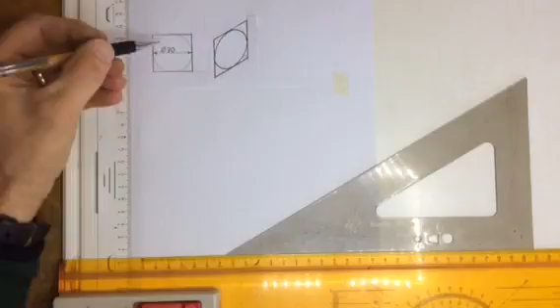Now, the problem with an isometric drawing is that you can't draw a standard circle, because if you have a look, the square that would have the same length as the diameter is now being squeezed, so whatever is inside that square is also going to get squeezed, which means that it will become distorted.

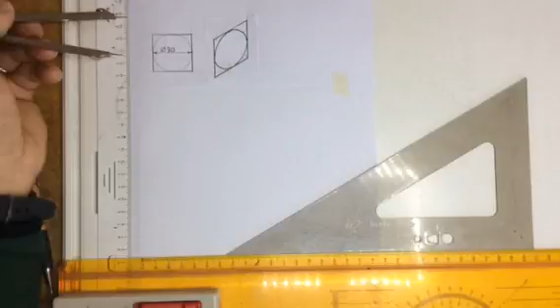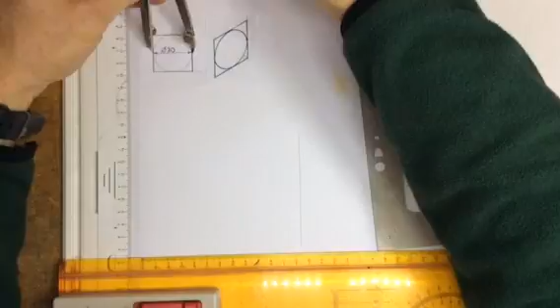Right. Last year you did a little isometric cube, and the way that we did that was to draw a line. You then take a radius of that amount, whatever the diameter of the circle that you're trying to draw. You then draw a circle, and inside that circle that I'm drawing now, I'm now going to draw a

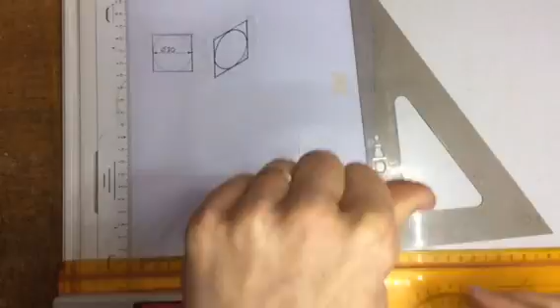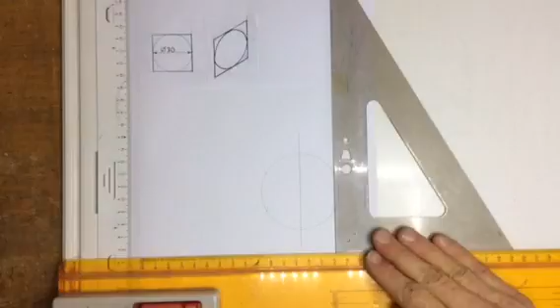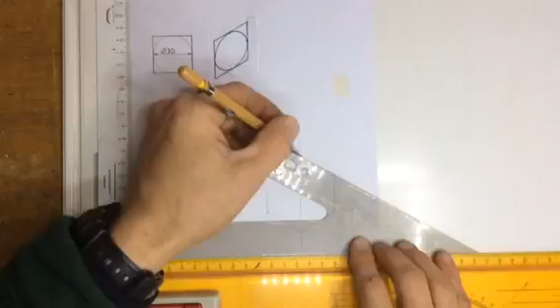hexagon. Where I do a hexagon, I place the point over there, I arc off over there and over there, take my point up to the top over here, I arc off over there and over there. Right, once I've got that, I can then draw in lines connecting those points over there, lines connecting that point over there, that point over there, lines connecting those 2 points over there, and if you look carefully, you've got a hexagon.

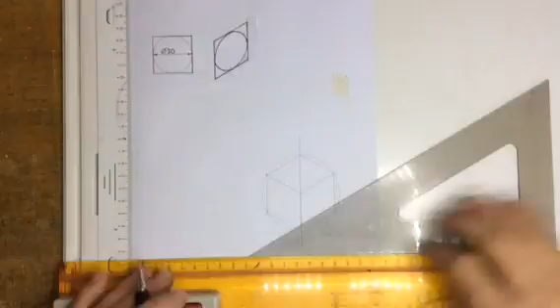Finishing that off, I'm going to draw an isometric cube. There's my isometric cube. Right, once I've got that isometric cube, I'm going to just deal with this face right at the front over here. Just going to darken that in just a little bit so that you guys can see the idea.

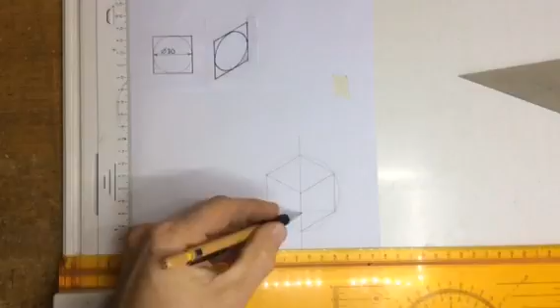Right, once I've done that, I need to find the center of this line over here. If I draw a line going from this corner of the cube to that corner of the cube, it will go exactly through the center of that line. So I can now take that measurement. Can you see it's the same?

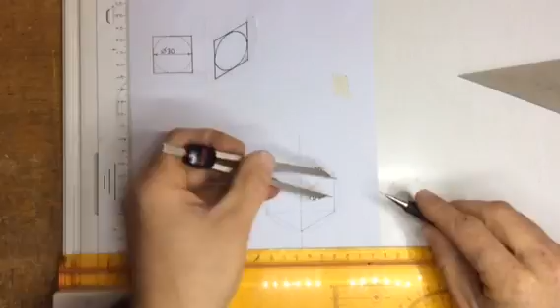All right. I can now take that measurement and I can mark that off on all of these lines over here. So there's the center of that line, the center of that line, center of that line. All right, so I've now got the 4 centers, and I'm now going to take lines from the obtuse angle over here to the center. That line's already drawn in.

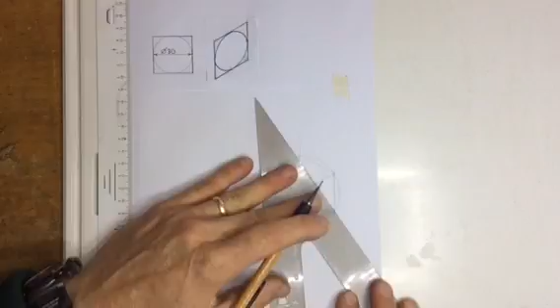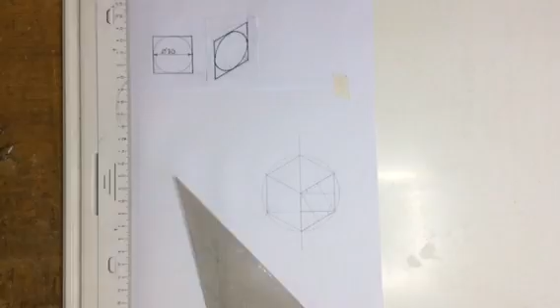I'm going to take from the obtuse angle again to the center of that line. I'm going to take lines from this obtuse angle over here to the center of that line, and from that same obtuse angle to the center of this line over here. Right, once I've got that, I can now draw my isometric circle.

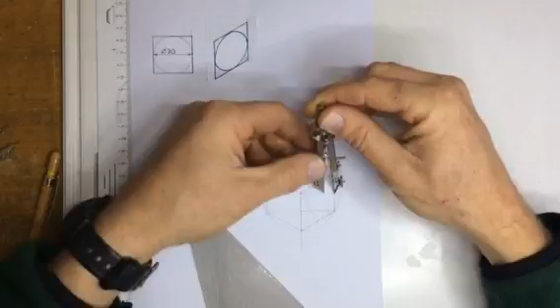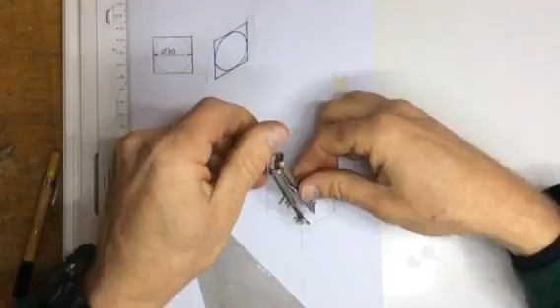So, step number 1, I'm going to take my pair of compasses, and I'm going to set my pair of compasses to this very small little radius over here. Okay, so I set that very accurately to that radius, check that it fits. There we go, it's fitting nicely, and I draw an arc. I then take it down over here, check that it fits there, and there, and draw that arc.

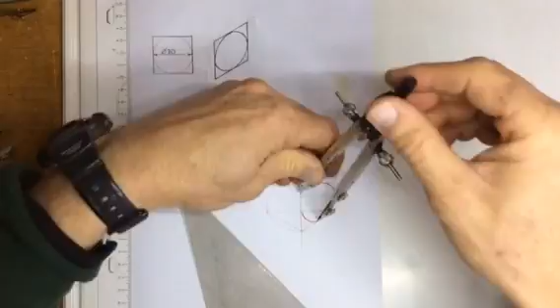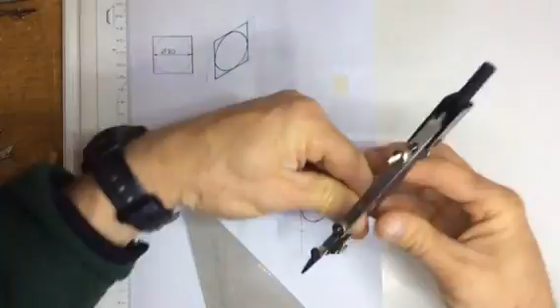Right, once I've got that, I now take my other pair of compasses, and I'm going to draw the larger arcs. Just going to use a different color over here. From that point, just extend it to the correct radius, and I can draw that arc in over there, and draw in that arc over here.

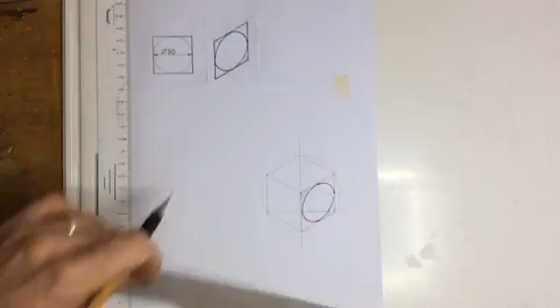Right, once I've got that isometric circle in place, I now need to draw a separate isometric circle a certain distance away. That circle, I'm going to say we're going to draw an isometric circle 80 millimeters away from this one.

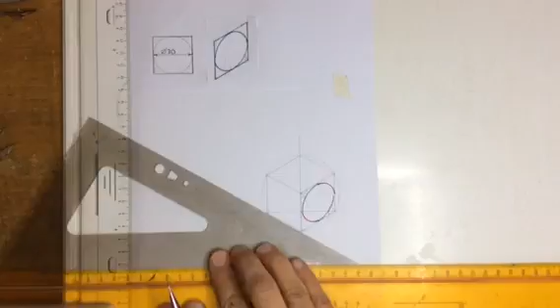Take your set square. Just going to blot this first because I've been using ink, otherwise we're going to smudge it. Note I'm lining the set square up with that line at the base. I now place my ruler up against the edge of the set square, and I slide my set square across to this point over here. I'm going to call it point A.

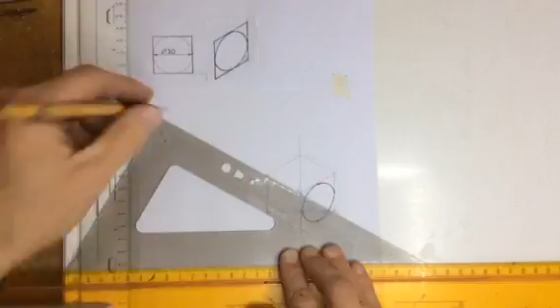And I'm going to draw a line coming out from point A. I'm then going to move it to point B and point C over here, and I'm going to draw a line coming out from those 2 points over there. I'm then going to move it across to, I'm going to call this point over here, point D. And I'm going to draw a line going out. You'll see that all of those lines, they are all parallel to this line at the bottom. Okay? There's 3 parallel lines, all parallel to that line at the bottom.

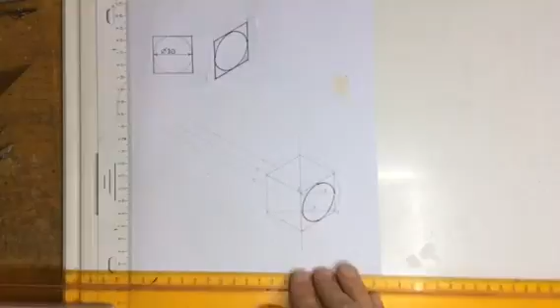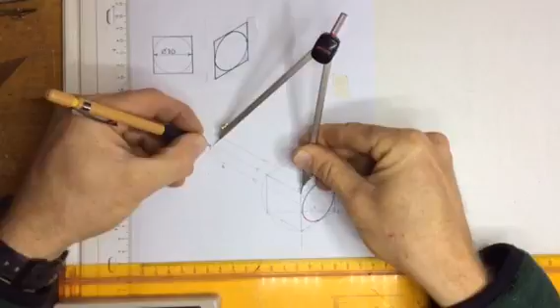Right, once I've got that, I'm going to measure off that distance of 80 millimeters. So the cylinder length is 80 millimeters. I'm going to take that and I'm going to place it at point A. I'm going to make a mark. So there's point A. I'm going to go to point B. I'm going to make a mark. There's point B. I'm going to go to point D. I'm going to make a mark. Point D. I'm going to go to point C. And I'm going to make a mark.

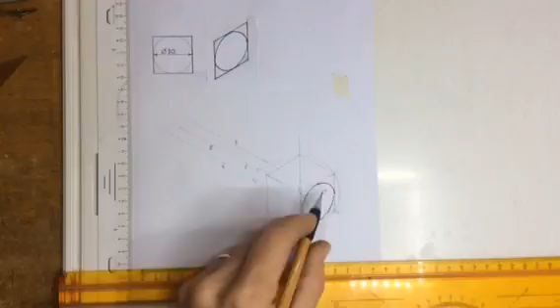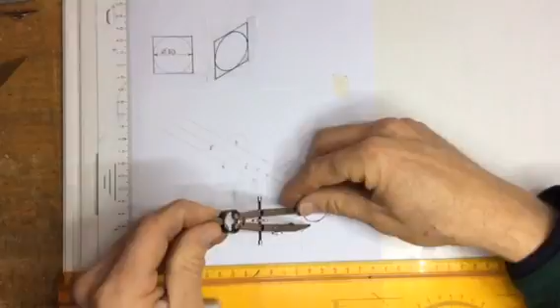Point C. Right. Can you see how those 4 marks over here have been transferred exactly 80 millimeters away from there? If I use those as the centers, I can then draw in an isometric circle using the same radii. Okay, so I set my pair of compasses to that radius. At D, I take it to D, and I draw a construction line circle, not a dark circle, construction line circle over there. I go to point A, take that radius over there, take it back, draw a construction line circle over here.

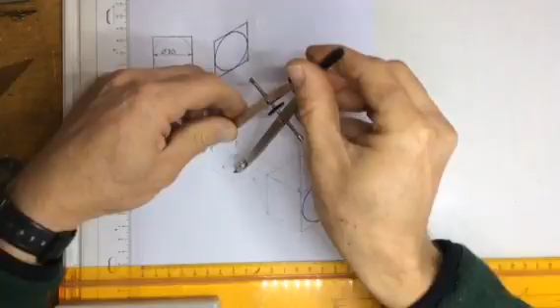I'm then going to take this radius over here, and I'm going to move it to point B, and I'm going to draw a construction line circle over there. I'm going to take the radius from C. Let's just get that correct. There we go to C, and draw my construction line circle in over there. At the end of the day, you can see that there's my isometric circle being drawn 80 millimeters away from my original isometric circle.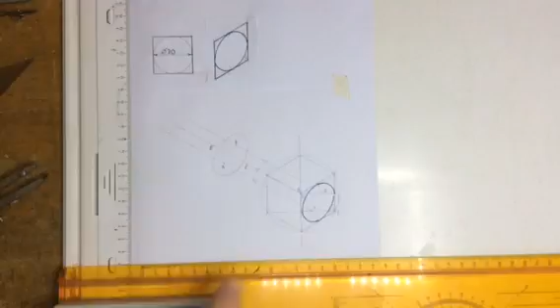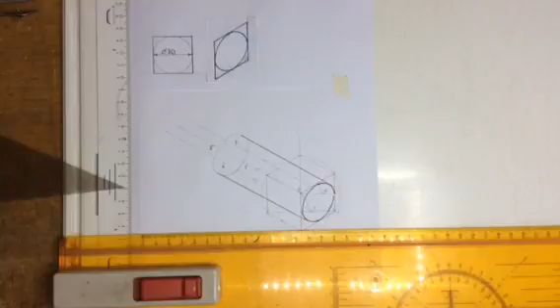Once I've done that, I can then take a tangential line from the edge of this arc to the edge of that arc, and take another tangential line from the edge of that arc to the edge of that arc. There we go. And you can see a cylinder beginning to form. Now I can see what needs to be done in dark and what needs to be done as hidden detail. This part over here I'm going to say is hidden detail. That part over there is going to be dark.

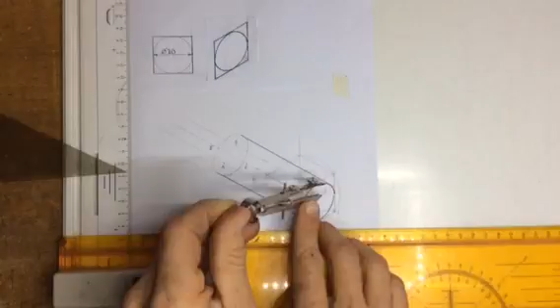So I take my radii that I got from over here, and I take that back, and I darken in the portion of that line that still needs to be dark. There it is. A should have exactly the same radius. And then I take my arc that I got from over here, and I can take that to point C and draw that in over there. And that is your isometric cylinder.